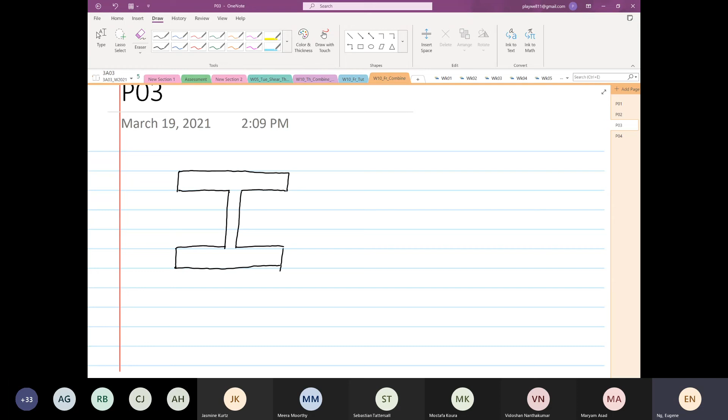I like today, I like fish. Sorry, I'm doing Peppa Pig. Okay, I do apologize. I like Peppa Pig. I was in England doing my PhD or my undergrad, and the British are so typical. The British, when they are impressed with something, they go, "Ooh!" Peppa Pig does that, and I will not stop laughing. And my daughter is like, "Daddy, what's wrong with you?"

Okay. So, was that Maryam that asked the question? No, it's Jasmine. Okay, sorry, Jasmine. I do apologize. I was thinking the whole class is just Mostafa and Maryam. Okay, it's not. I do apologize.

Okay, so you were asking, Eugene, what happens if the element A is here? Am I right? Yeah, that's correct. Okay, I got it. Okay, so if it's here, right? So we are going to find the shear. So it is equal to Vx over Iyy times Qy. Okay, so we divide here. In fact, if I tell you the answer, you'll say, is that it?

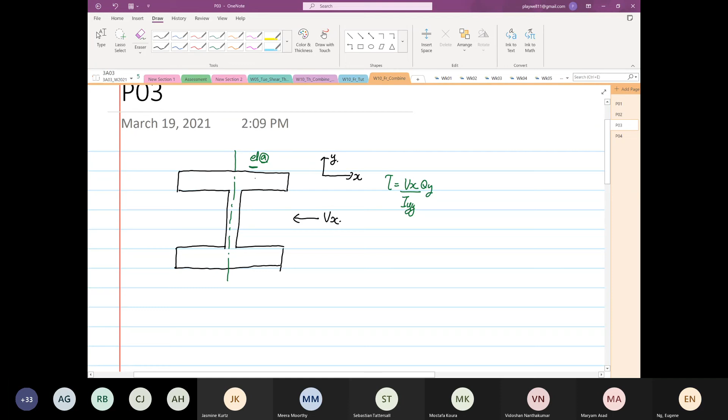Or maybe the element is a little bit further over, because I understand that the force is coming down the web there, but I'm just wondering about the middle of the flange. So like this one, the Q is here. So you want me to do it on the left hand side of the centroid? No, just beside the centroid. Beside the centroid over here. Yeah. Okay. So just beside the centroid, you only take this area.

Would you not need to consider the area from the flange? You have to consider this. Okay, cool, I just wanted to confirm that was the case. Yeah, based on the rules. I'm not guessing. This one I'm sure, because I consider the rules that I've written for you guys. Are we clear? So you divide this twice. So this is one area you consider. Wait. Sir, with that area, don't you have to consider the 2Q? Yes, you do. Okay, makes sense.

Okay, give me time to think, you cheeky sort. Okay, I'm a slow computer. Okay.

Now the reason is why. Anyone? Anyone? The reason is why. Is it like, wait, someone else going? No, is it like the WF and the W, like the flange and the web? You add those two together to get that sort of thing? Yeah, pretty close, but that's different. You have to consider that area of influence. Okay. Any other? This is a good one. And also based on the 4 rules or more rules.

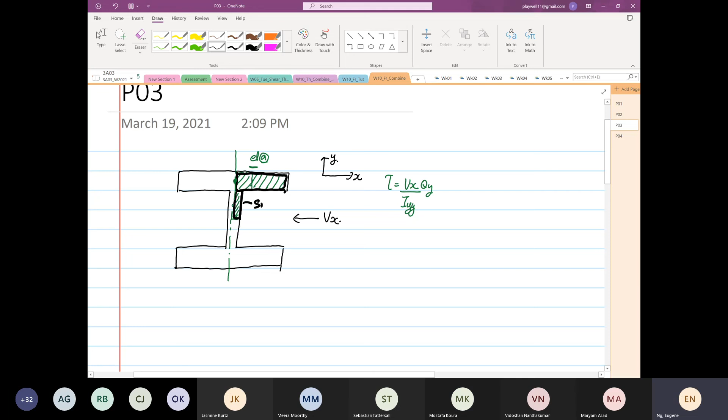Okay. Anyone else? Any questions, please? Just the last thing. So for a situation like this, essentially we use the rules and we follow the shear flow. So it would come from the side, like from the right, and from the middle. Yep. But remember what I showed you guys, right? From the middle, if it's thin wall, it is very small. I've seen examples where they take it off. I don't want to take things off. I just leave it there.

Anything else? Also, Jeevan had a question in chat. Oh, where? Thank you for telling me. What thickness will you use for that type of question? Jeevan, I will tell you when it is a thick wall and when it is a thin wall. Now, some of you say, Eugene, this is BS, you tell us now. Now, my question for you is this. In the real world, what will you do? You were not told.

Anyone? Let's say you are designing a structure now.

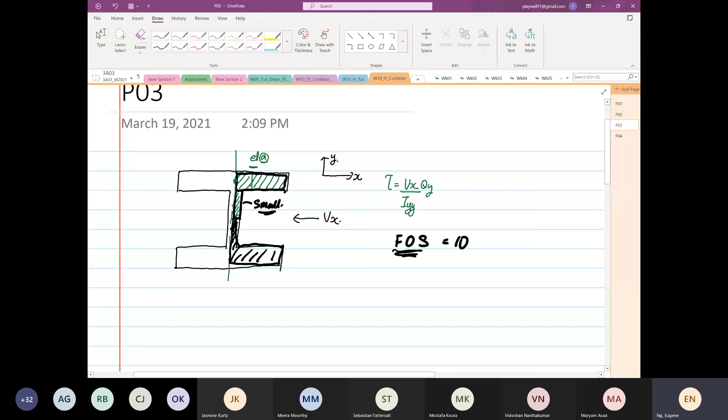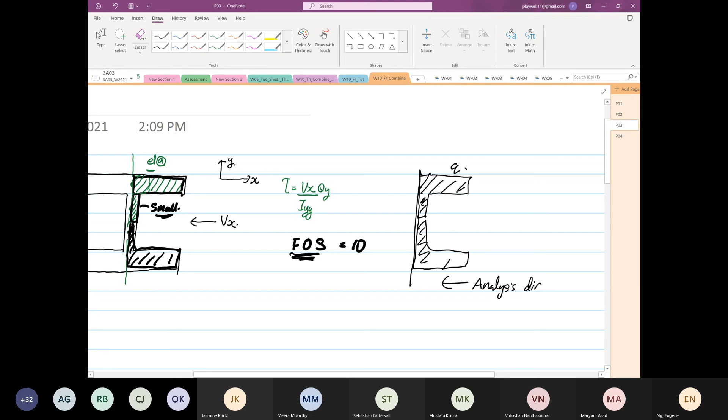Okay, you are right, Meera. It's 2Q. If I don't follow what I've been teaching you guys, or follow some of the textbooks, if they already know that this area is the one carrying the Q, you can just use Q. But I don't want to confuse you guys. I've always been teaching you to consider the area based on the analysis direction. Right? So yes, you consider it's 2Q, Meera.

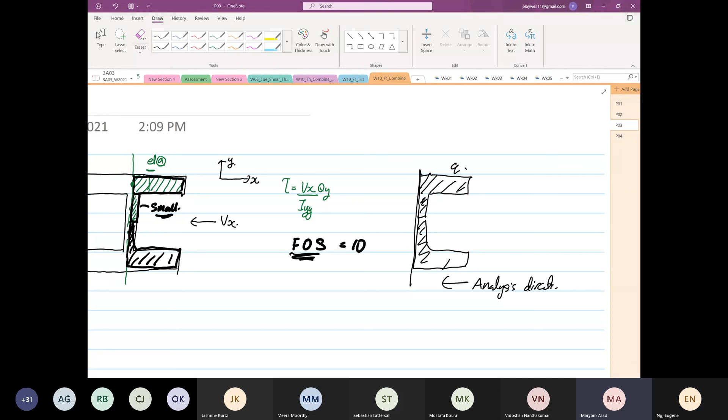Anyone else? If we took the element A that you drew over there, what's the t that we use? So if it's this area that we are looking for, right? This is the thickness. No, sorry, I meant the other point. This is still the thickness. So we don't include the thickness of that tiny small area? No, we don't. Okay. And I will not ask a question like this, okay?

Hello? Okay, Maryam, good. Okay, if I'm going to pick a point, because now it's testing your understanding, not your philosophy on what you believe, okay? So I will pick one here, or put one here, or put one here, okay?

Any idea what PhD stands for? Anyone? I have a PhD, but what does it stand for? Anyone? You will have a bachelor's when you finish, right? I have a PhD, so anyone know what it stands for? Right, permanent head damage. Emily, you are absolutely right. Okay, so I don't want to damage your brains yet until you do your PhDs. Okay.

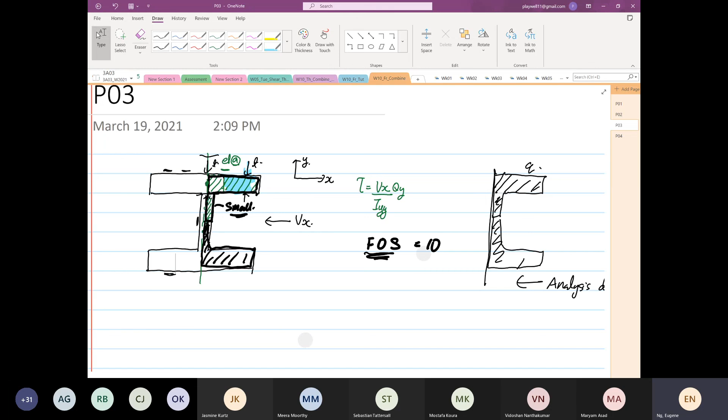Any other questions? Any more? If I don't hear anything, I will start on Mohr's circle. Then all of a sudden, a lot of questions come up. Okay, okay. What I'm going to do now is knowledge for you guys that you apply in later courses. I won't test this, by the way.

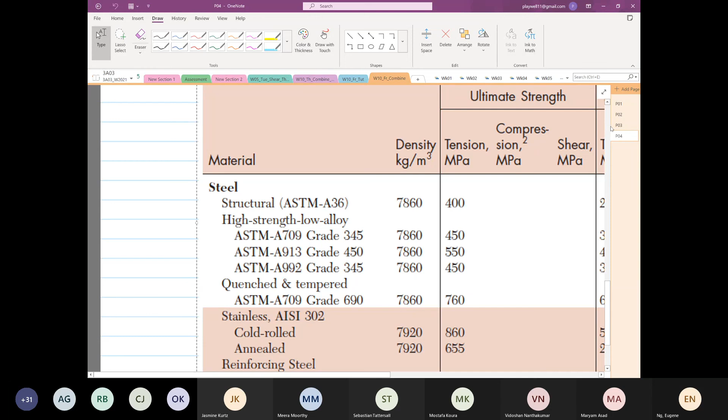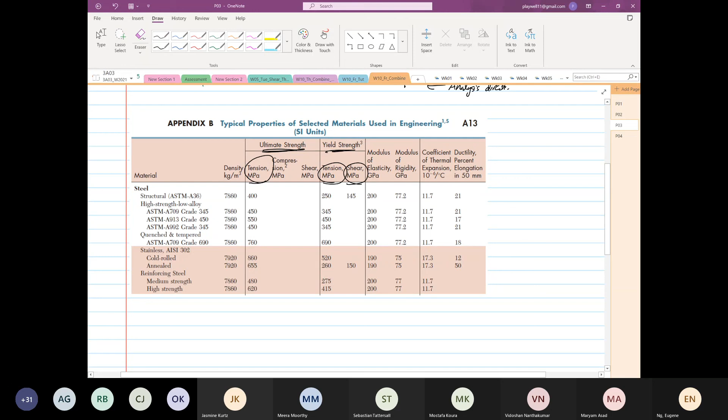Okay, so now, in your homework, you are always asked to find the principal stress and maximum shearing stress, right? So now this is a tip. If you get any material property handbook, you see this. You see density, you see tension, so ultimate strength, yield strength. You see E value. These are straightforward. These are very easy to understand.

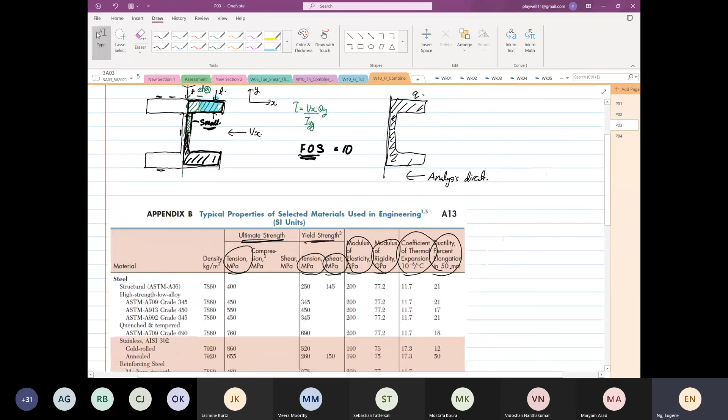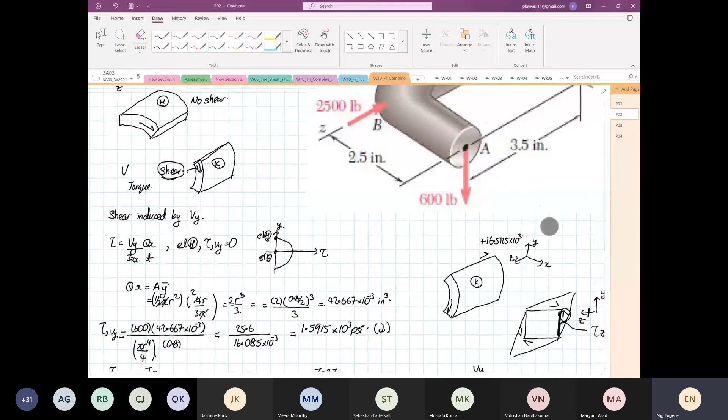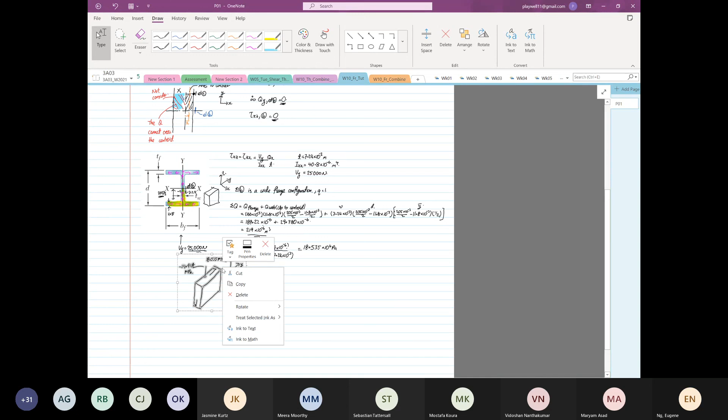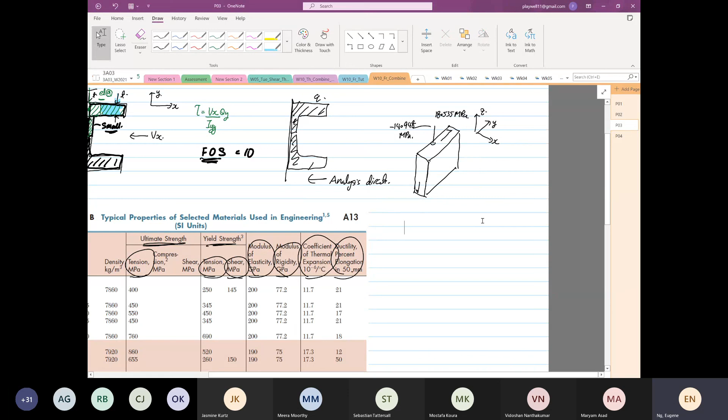Okay, now let's say, from today's example, this morning's example, you have a stress state like this. So you calculated it already, and this is your stress state. Right now over here we have a normal stress, and then we have a shearing stress.

Question for you guys: what value will you use? Anyone? What value will you use? Anyone want to make a guess? So we have tension ultimate, tension U,